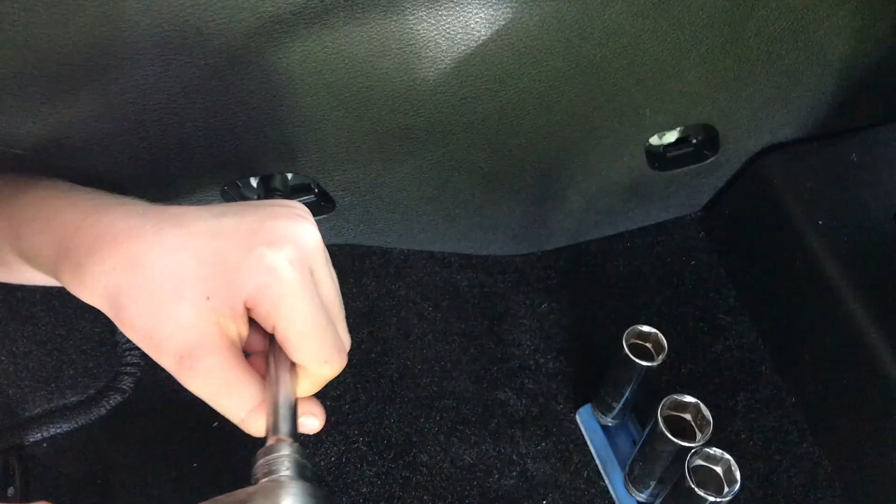It has the fold and tumble seats in it. So we're looking at these 2 covers right here, and I believe the screws are under there. All right, 2 covers off. And then we just need to take those 2 bolts out. So now we're going after those 2 bolts in there. They're a size 10, 2 in each side of the console.

All right, so we got those bolts out, and now we can actually just lift the center console forward, and you can see the chassis underneath, so let's go ahead and lift it.

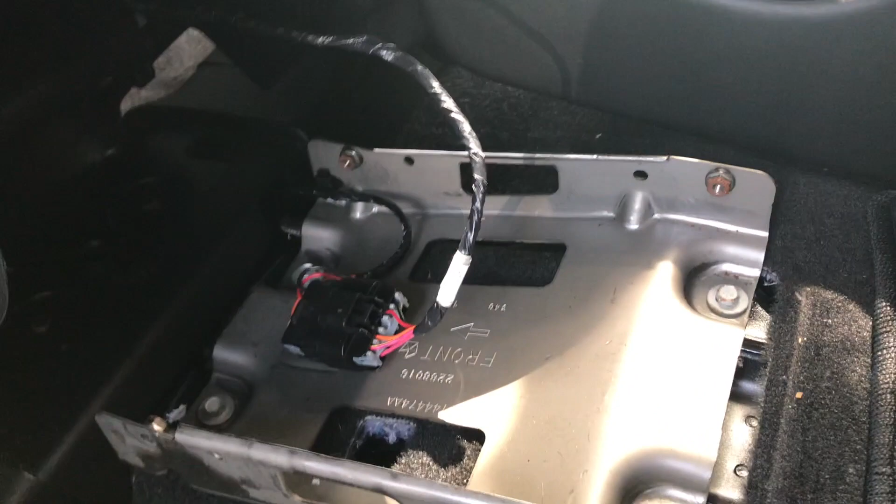Okay, you can see it's got kind of a chassis here underneath with 4 bolts in it. Those 4 bolts go into the mini console, and just that one power adapter there. So we're going to unplug the power adapter, and we're probably going to tape that one up. It'll be fine because it'll be under the plastic cover anyways, but I don't want any chance of a problem. So we'll tape that one up so that we can choose to use it when we want, and untape it when we get ready to use it again.

Then we just pull these 4 bolts. The mini console actually has the same 4 bolts going in there, so it's a direct swap out, so it should be very nice.

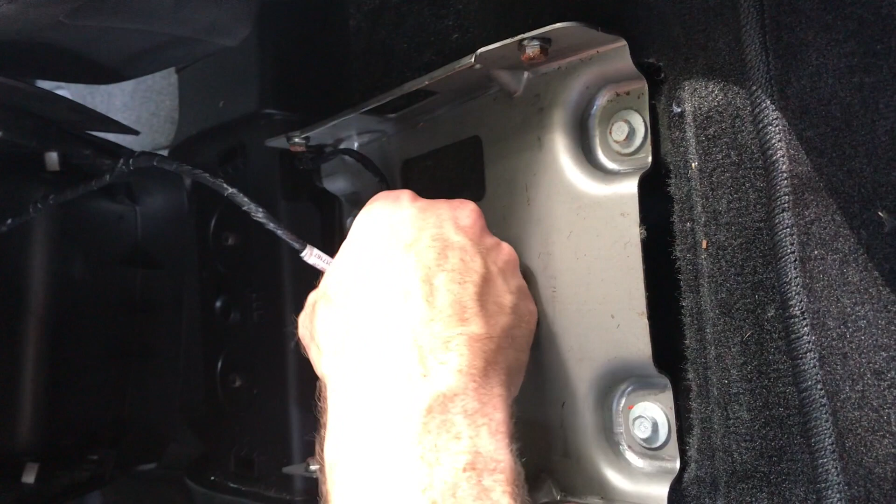All right, so now we need to remove this wiring harness here, which there's just a button on top, a little plastic tab. You press the plastic tab and you can remove that harness, and that takes all the power out. We're going to tape all that up so that we don't have any problems with it.

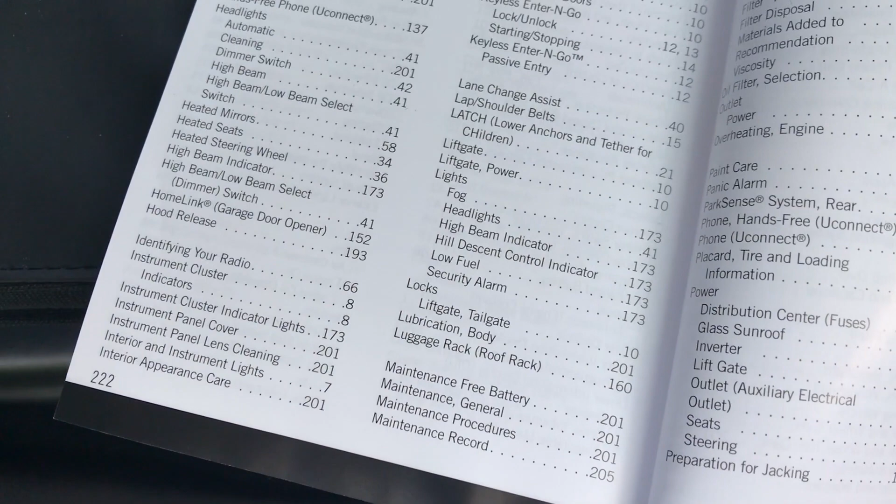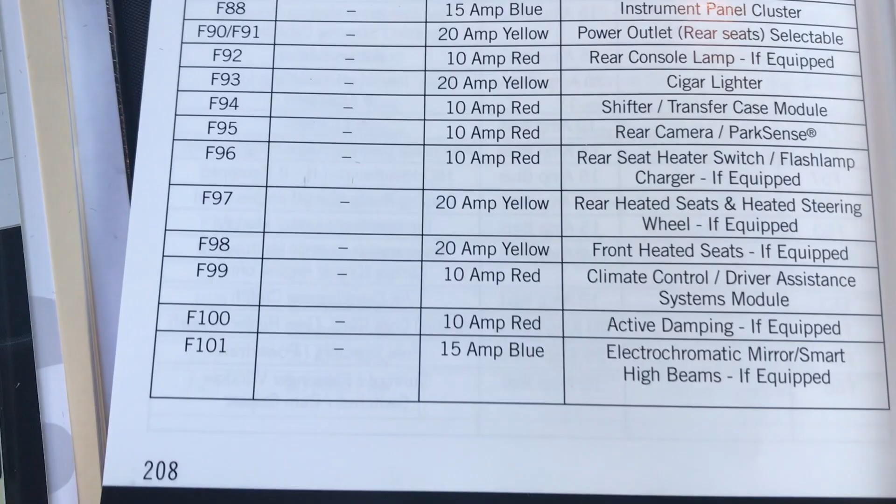So I open up my owner's manual here, and although they don't tell you a ton of information anymore about actual working on the vehicles, because so much of it is electronic in these now, they do tell us we've got fuses on page 206. What I'm looking for is a fuse specifically for that rear console that we can pull so there won't be any power to it when we're not using it. I'm looking here at page 208, with all the fuses listed. Down here in the 90s, you can see 91 power outlet rear seats, 92 rear console lamp, 93 cigar lighter.

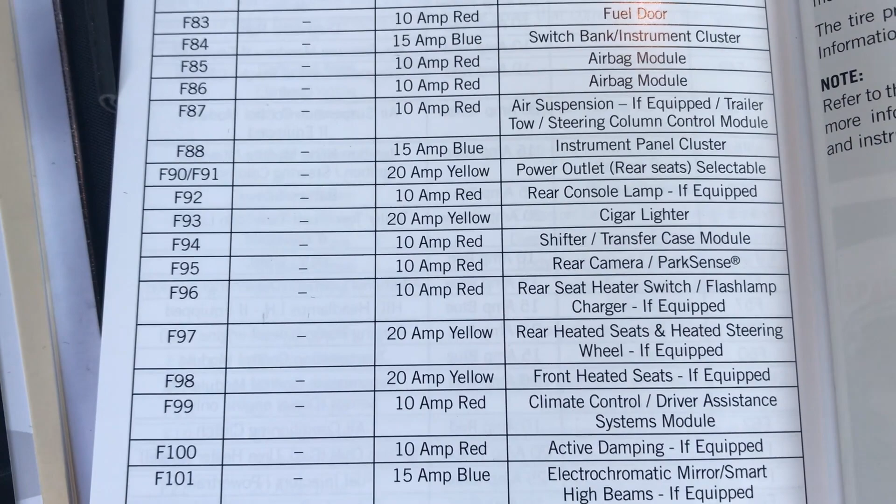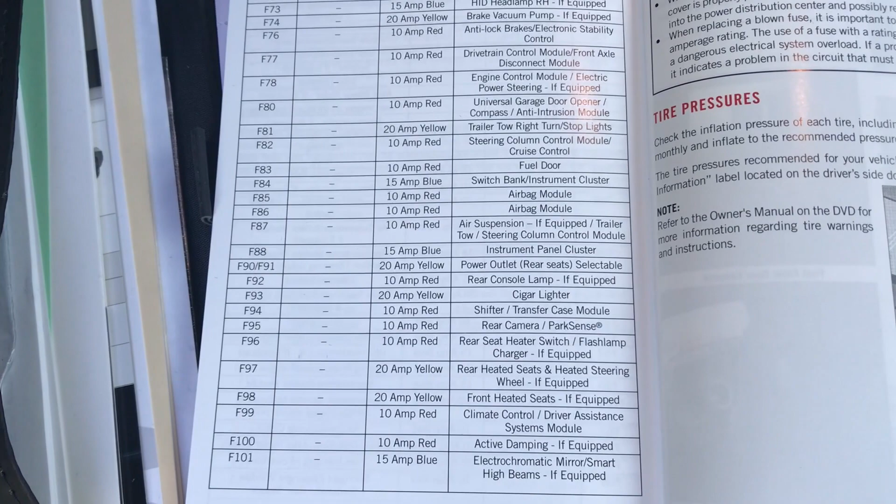I think probably two of those are the actual power back there. So we're going to check those out up front, and then we'll voltmeter the fittings back there and make sure we've got the power off before we tape all this up and cover it up. All right, so we're gonna test this out.

Actually, I realized that there's no 115 power in here, it's just 12 volt power. So we got the 12 volt power on this side.

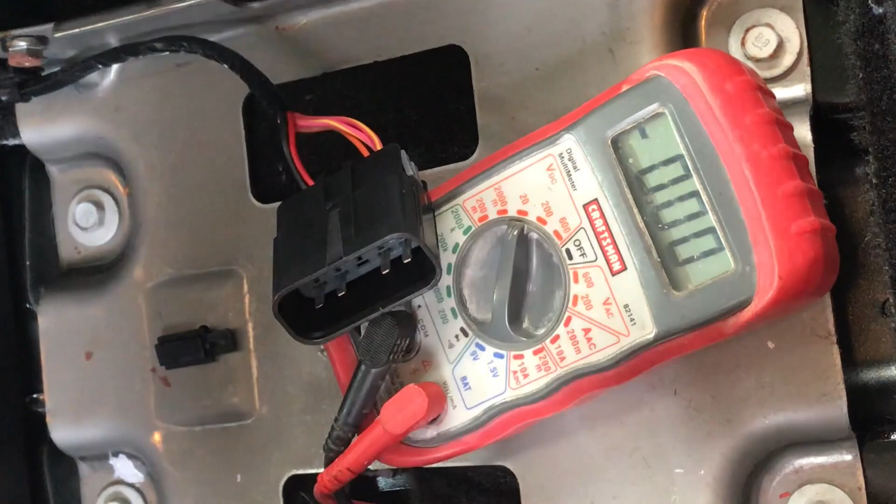I believe that one... oh, that's backwards there. Why would we get the minus? So this one I believe is the power outlet.

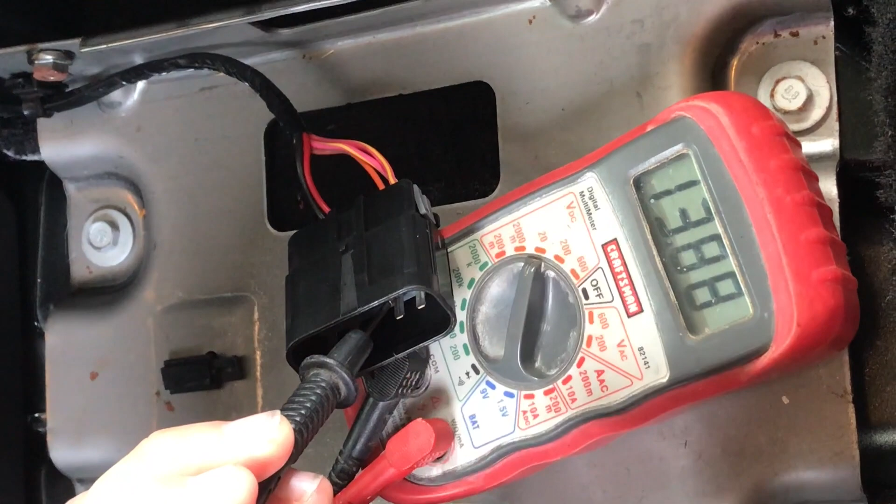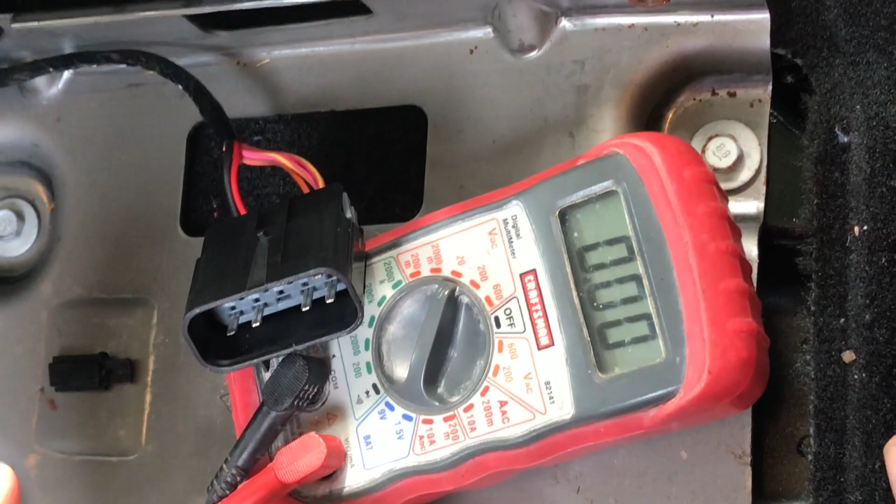And then over here we've got probably the lighting, those smaller wires, and maybe the USB charger, those lower amperage ones. So we're gonna pull the fuses and make sure this power's off before we put the mini console on top of this, so you won't have to worry about anything sparking in here. We wouldn't have to probably worry about that anyway if we just taped it up, but just to be extra cautious, we'll go ahead and pull the fuses out.

All right, now we're gonna look for those fuses and see if we can pull those out. Oh, look at that, so beautiful.

My wife picked the car, but I picked the engine. We got that Hemi in here.

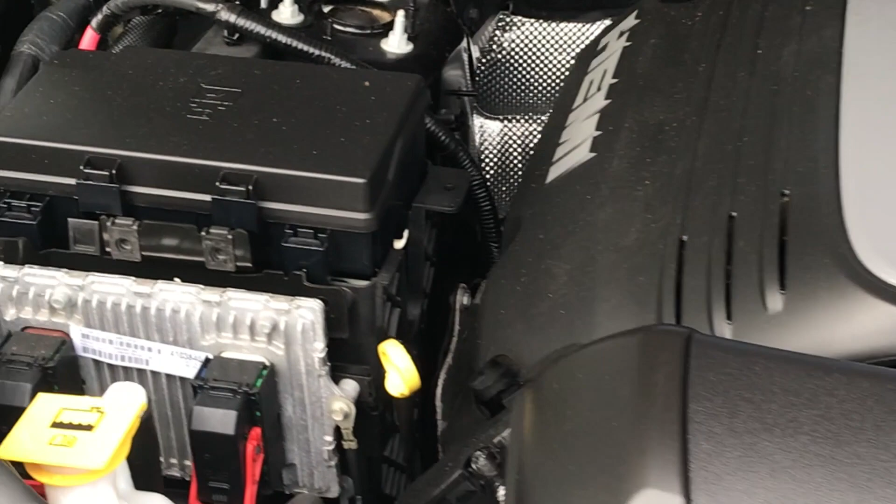So fuse panel over here. Let's go ahead and see if we can find those fuses and pull them so we won't have to worry about the power back there anymore.

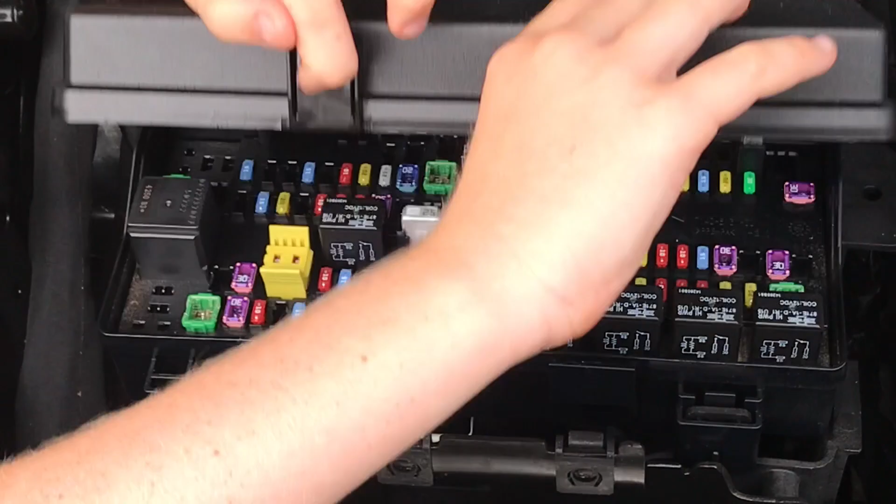All right, so fuse panel, and the beauty is they actually marked them all. Some of you guys may have worked on ones where they just give you the number and you have to try to reference it all, but they got it all marked here. So we're gonna look and see if we can find where those fuses are. I believe they were in the 90s.

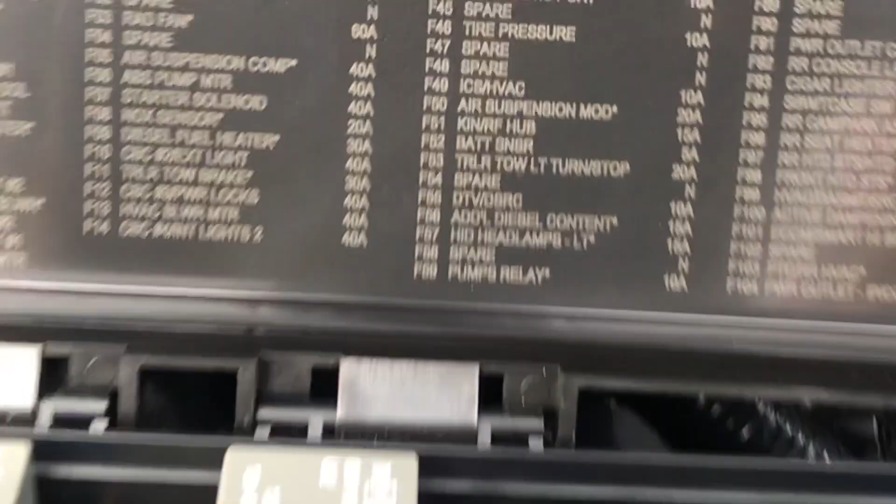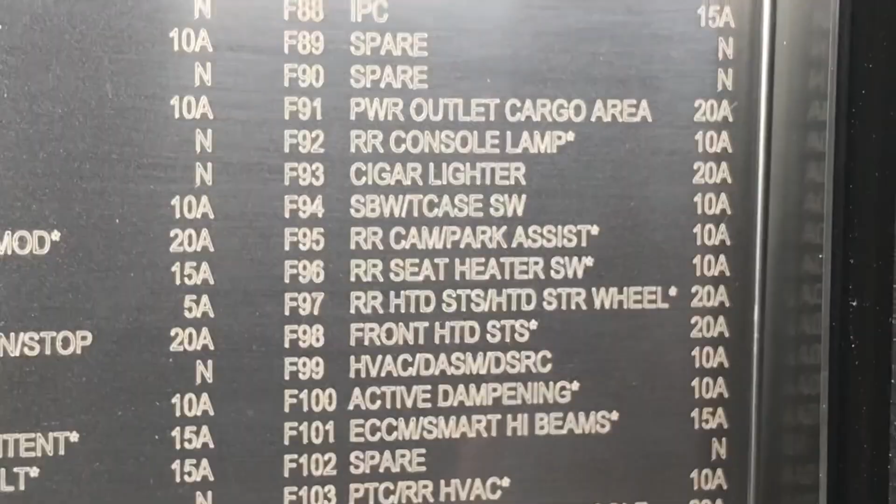Yeah, so we've got over here, power outlet, cargo area, rear console lamp, that's a 10 amp. Power outlet, console, that's the center console.

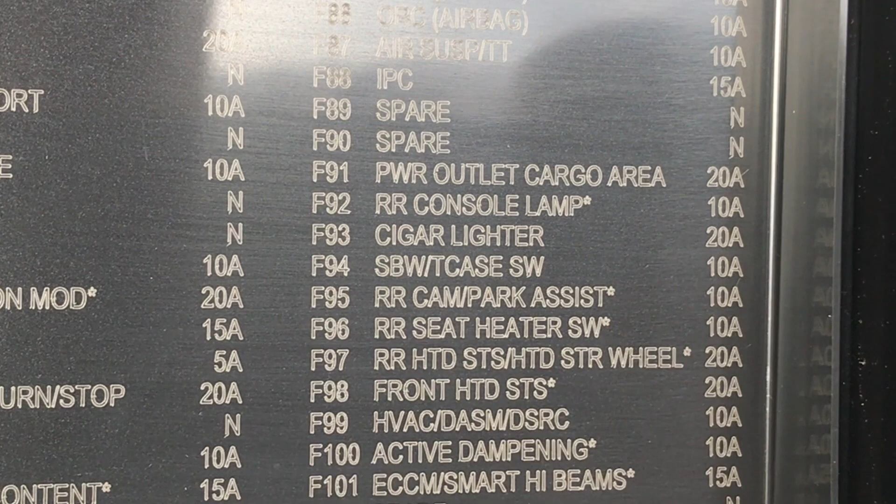All right, so we'll pull that, number 92, and then we're gonna try to see which other one it is, 91 or 93 maybe, I'm not sure. Cigar lighter, I like that—like anybody still lights cigars in the back of their Durango.

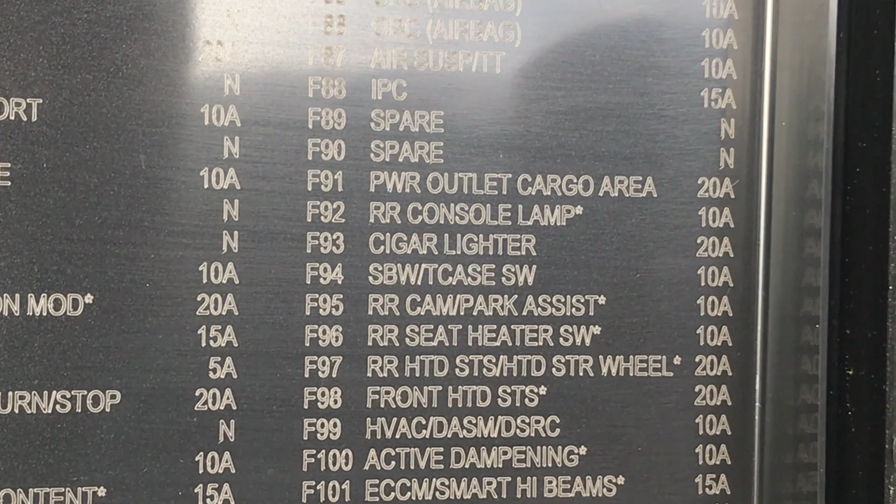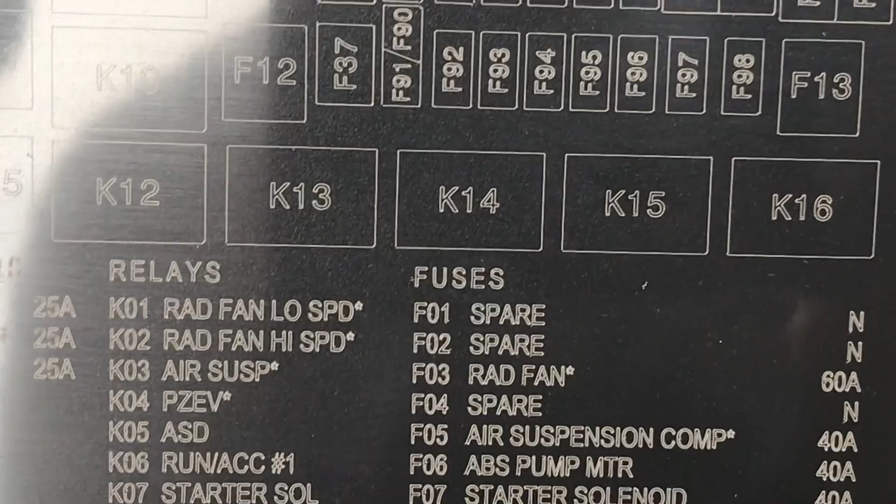And then we've got 91 and 92. 91 was the power outlet. Rear cargo area, that's a 20 amp.

So that's this one right here. And then the 10 amp is 92, which is the console lamp. So that one we're sure of. It's this one that we're not sure if that's actually the power outlet in the very back or if that's the power in that center console, so we're gonna figure that out.

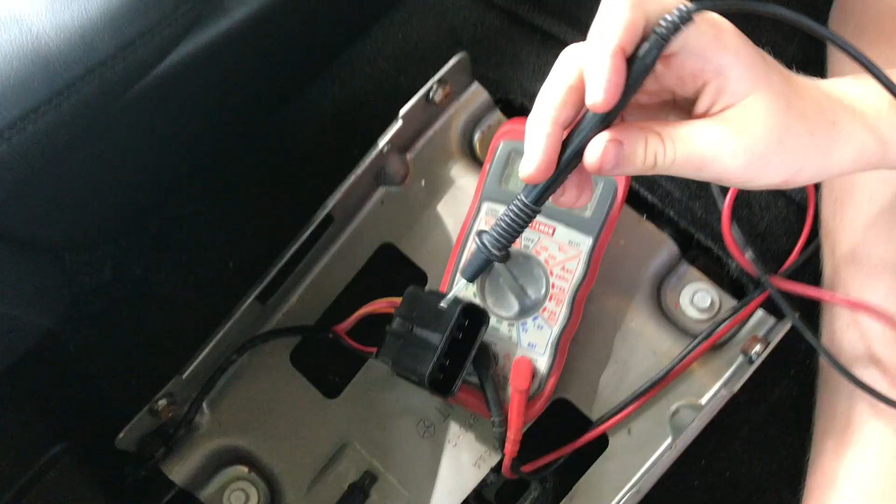Okay, so we're gonna test them out again. We pulled one of the fuses. We're trying to figure out what that second fuse was. All right, so that half is dead now.

Where does this go to? Same one? Yeah, that one with the bottom left one. No, you can't do them to the same top and bottom. We'll do the bottom left, the one next to that. Red one on the one next to it, yeah. Ooh, okay, so that one still has power.

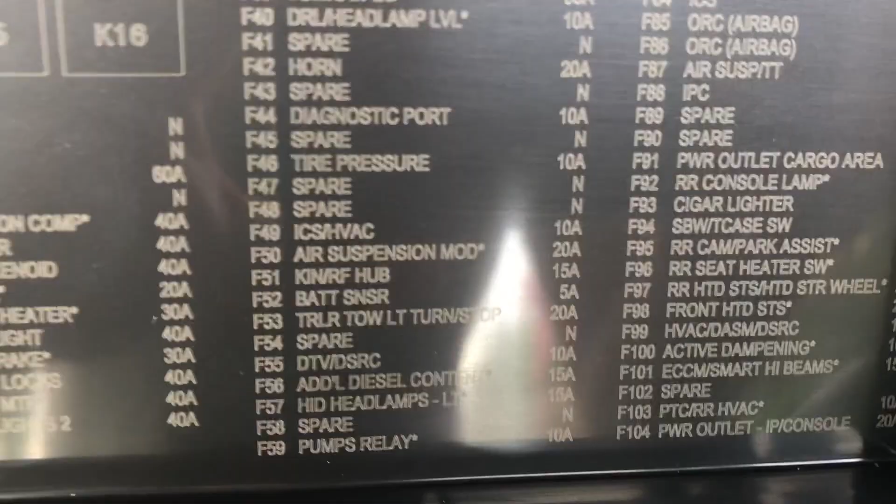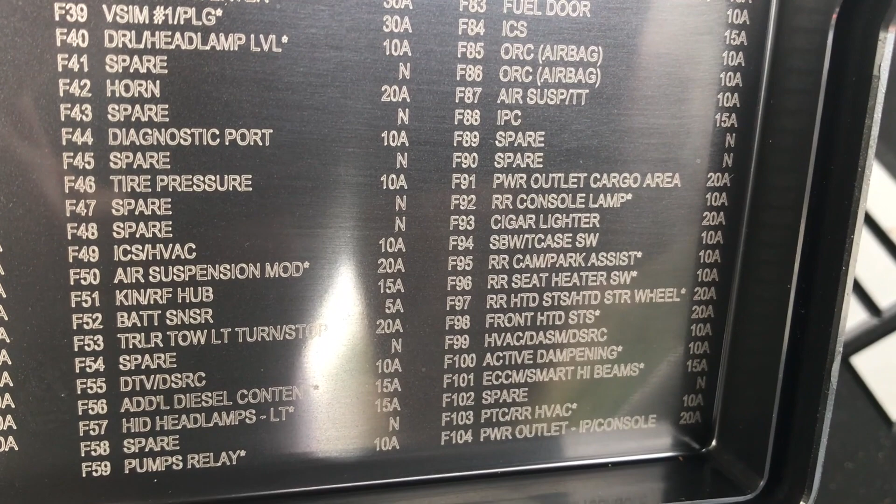So we still have some power in it. Let's see here. It was 92, which we knew, which is that rear console lamp. And then I didn't know if it was 91 or 93, which is the power outlet, cargo area. In the book, that one actually just says power outlet, it doesn't say cargo area. And then 93 says cigar lighter.

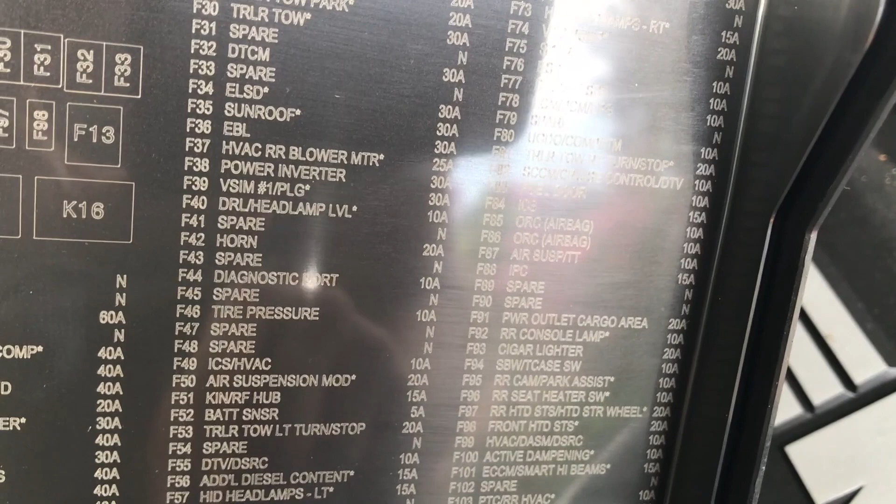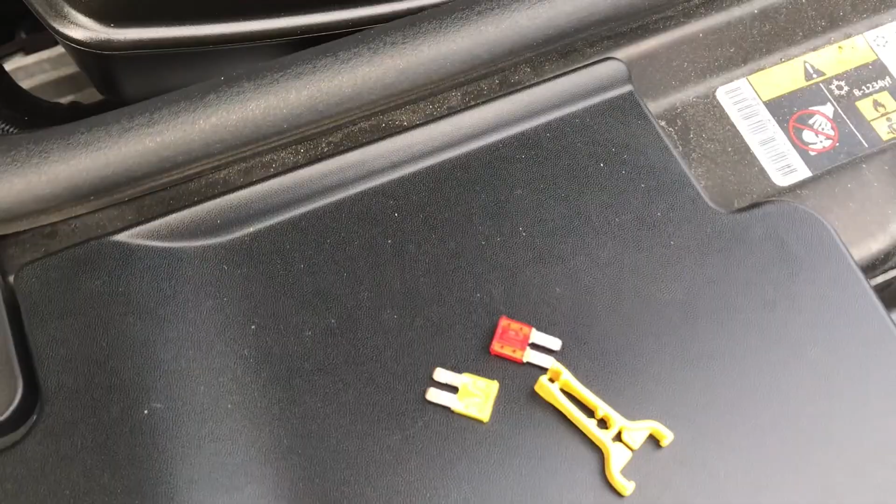So I tried 91 and 93. 91 is not in the console. 93 is the other power in the console. So it's 92 and 93 that will turn off the power in the console. So we pull both of those fuses, and I'm gonna make a note of that for when I want to put the console back in, but now we don't have to worry about any power back there in the console.

All right, so we got the power shut off. Now we're gonna pull this wire out because we're gonna remove this chassis, since the mini console bolts directly into the floor, so this chassis is coming out too. These are 10mm bolts as well.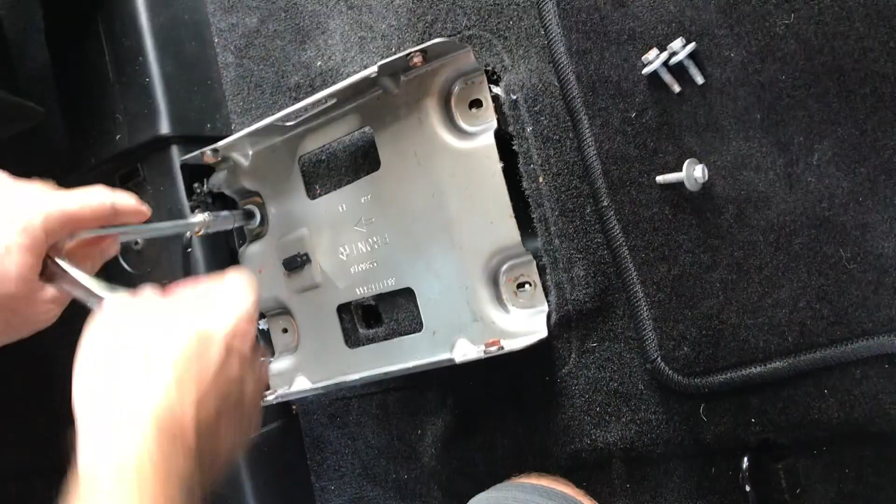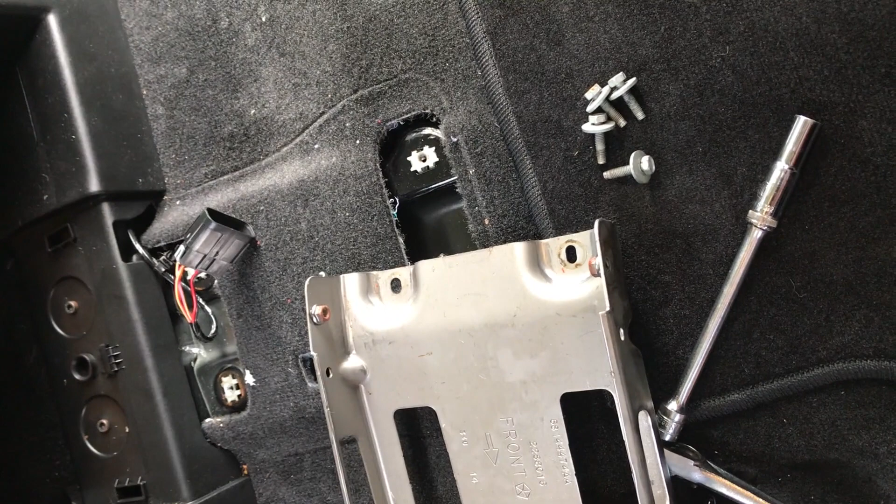All right, got those. Then the chassis just comes out, and we'll probably just be able to put the wires underneath the mini console. Even though we don't have any power, I'm extra cautious, so we'll still tape the end of that, just in case somebody were to add those fuses back in later thinking there was a problem or something like that.

All right, so we got our mini console in here. I went to the Chrysler dealer, and this was gonna be like 150 or so. They gave me a printout of the part numbers and everything. And when I went home, I told them I'd think about it, checked online, and one of the other Chrysler dealers was about, I think, $85 or $95, so we saved about 50 or 60 bucks.

I think dealerships price parts based on how much they have in inventory and how much they think they're going to use, so the prices were not the same at all the dealerships.

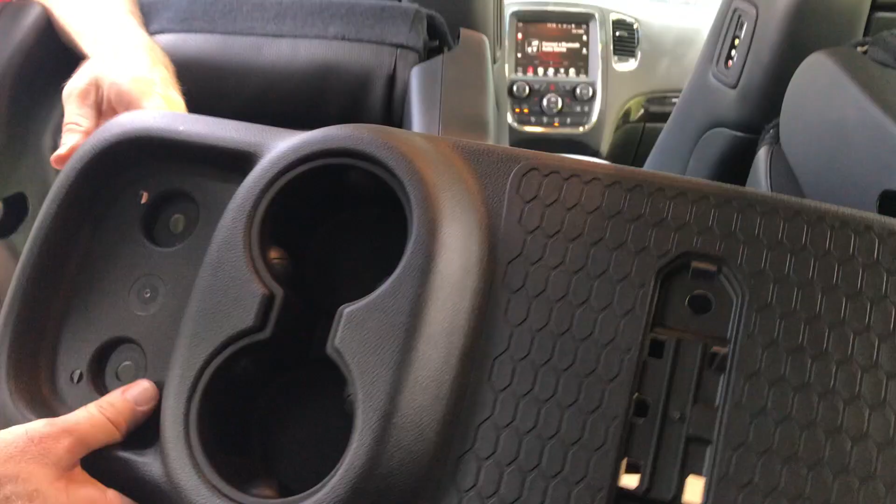So we ordered these parts. It actually takes 3 different parts. We've got the mini console, which is basically just one big piece of plastic with a couple cup holders in it. But you also need a couple of covers: one cover that goes on the front, and then the Dodge cover, which covers the screw holes in the back. I got those part numbers here, and we'll put them in the description in case you need them.

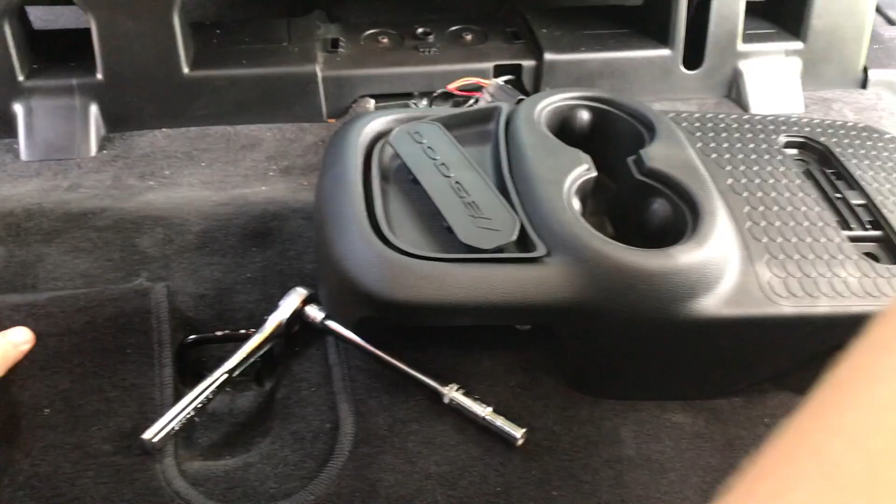All of that was just under 100 bucks, and this is all factory OEM parts. I wasn't going to buy some aftermarket recreations because I want it to fit right and look nice. This is a nice car, so we're going to do it right.

I taped up our connections here so that in case a year from now somebody is trying to figure out why a power outlet, cigarette lighter, or dome light doesn't work and starts replacing fuses, I don't want them to put the fuses back in and find this just open power back here. We know there's no power, but we got that all taped up.

Now we're going to put this console in. I believe it goes this way. Yep, okay, we're going to move those out of the way and get this tucked in nicely right there at the front, out of the way of the bolts.

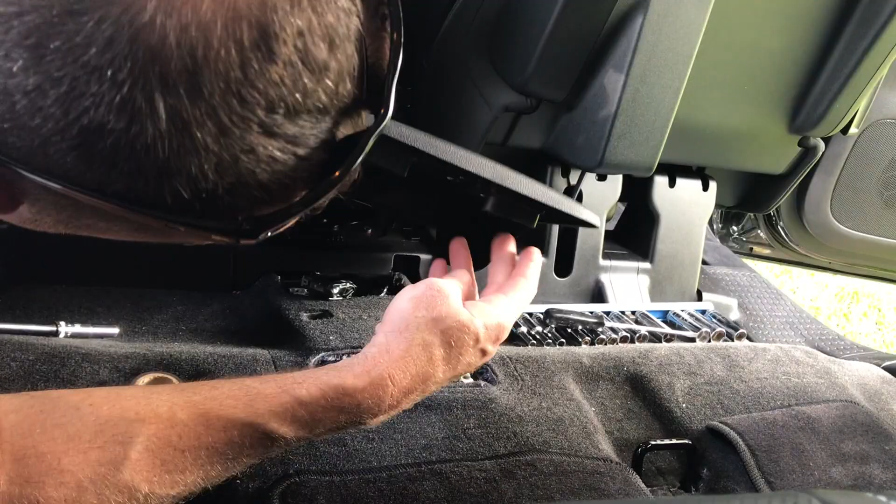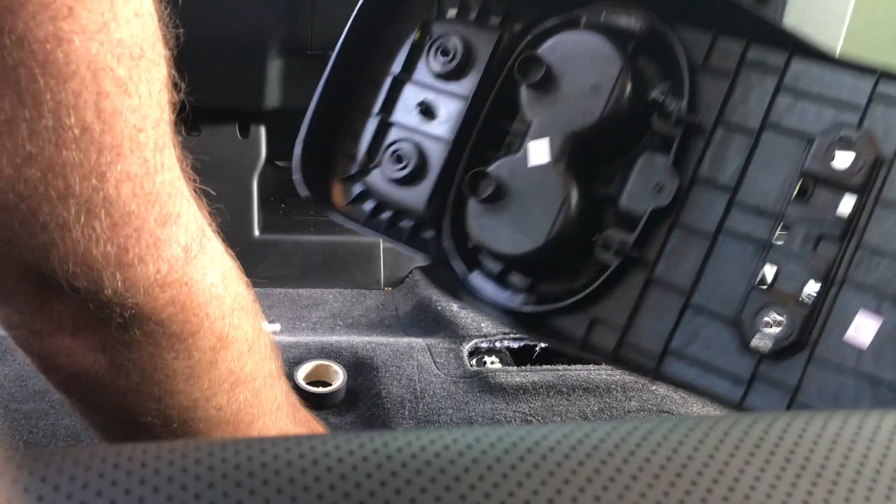It looks like the way they designed this, it has support feet in the back so that all the pressure is not right on those bolts, and then it uses these two hex heads up front as the front bolts. I don't think it uses the middle ones. Let's look at the bottom real quick - yeah, no center holes here. Those two center bolts would actually be under these cup holders, but it doesn't use those. Instead it uses the front ones.

So we're going to have to take out these two bolts up here, and then I think put some washers on them and use them. We'll do that and see how it goes. Let me get an Allen wrench.

So those front bolts worked, but the back ones were too short. I went up to Ace, the helpful place, and got some bolts to try. These are, of course, metric - 6, and the length is 35 on one of these, and the other is 40. So that's the 40, looks like it's probably too much. There you can see the difference in length, so I'll take the shorter one - that one should be just right.

So we're going to throw a washer on it, and I also wanted to put - I got some of these left over from another project - they're just plastic bushings. I don't know what originally Dodge had inside of here, but right now that's just open plastic and I don't particularly love that. So I'm going to drop a bushing down in there first. It'll sit on that little ledge right there. And that screws in nicely.

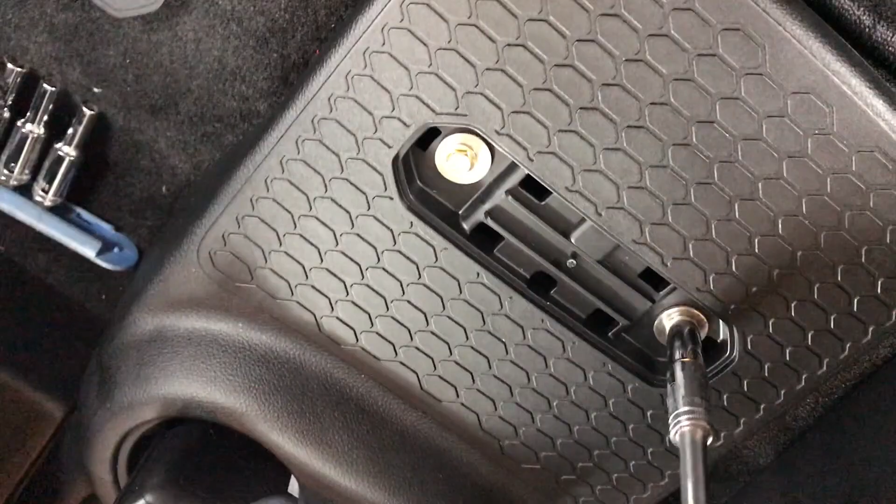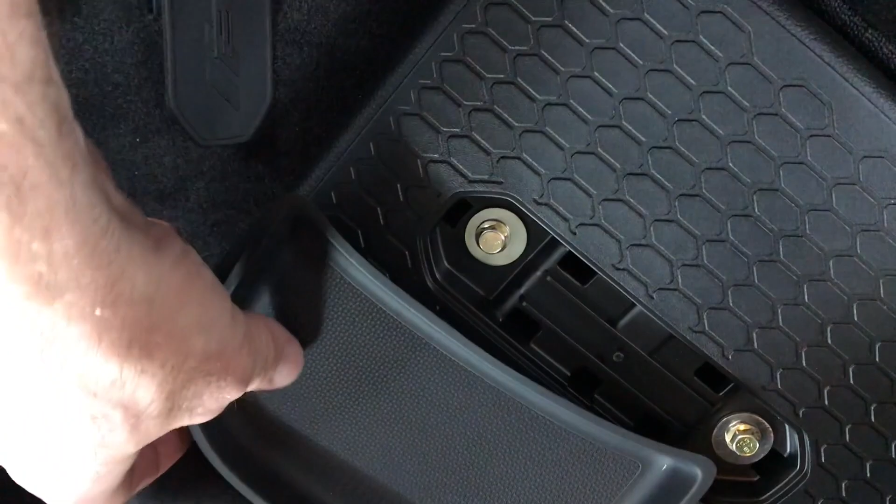Okay, that looks good. And then we got 2 covers - the front cover there for just kind of a little tray goes in nice. And then in the back we got the Dodge cover, which Dodge faces back. I wasn't sure if you would know, but they actually made the tabs different front and back, so you know you get that in place.

And there we have it. We took out the full console and added in the mini console, and it's pretty easy - probably took 30 minutes of work, and a lot of that was trying to figure out which fuses did what.

So now we can switch it back. I plan to switch this back whenever I go up to the mountains or something and need that storage, but then during the school year when the kids are climbing through all the time, we can go ahead and put this one back in so they can climb in between the seats instead of having to raise the seat every time they get in and out.